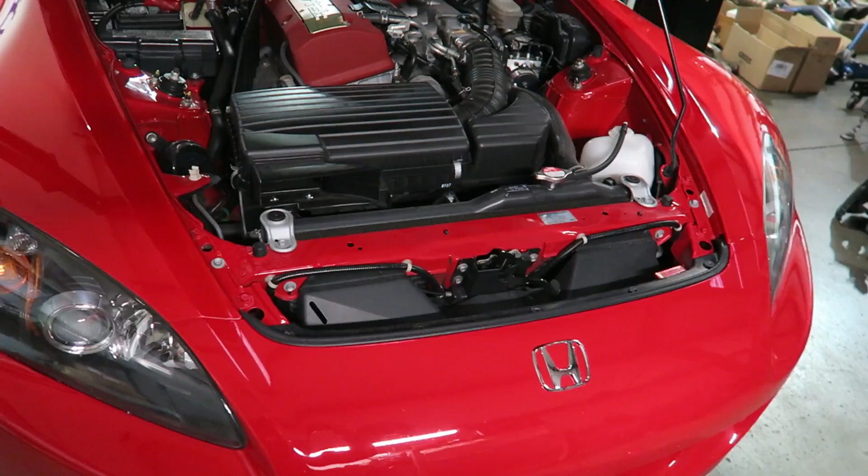So I talked about the Airbox mod. What I'm going to do is show you along the way what we do. I've tried a million different intakes on these cars, dynoed them, seen them in real world use, and believe it or not, the best intake you can do is stick with this. What I found is we changed the filter out. Okay, so this is the filter that you're going to buy.

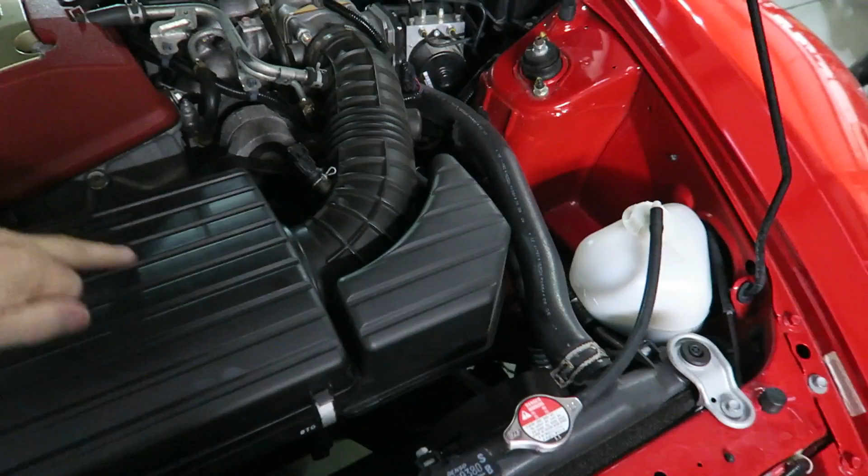This is the K&N replacement filter. K&N actually make a replacement filter. It's a large element filter that fits, but there is also some webbing in here that we remove. We block off this resonator area. Actually promotes more airflow through here.

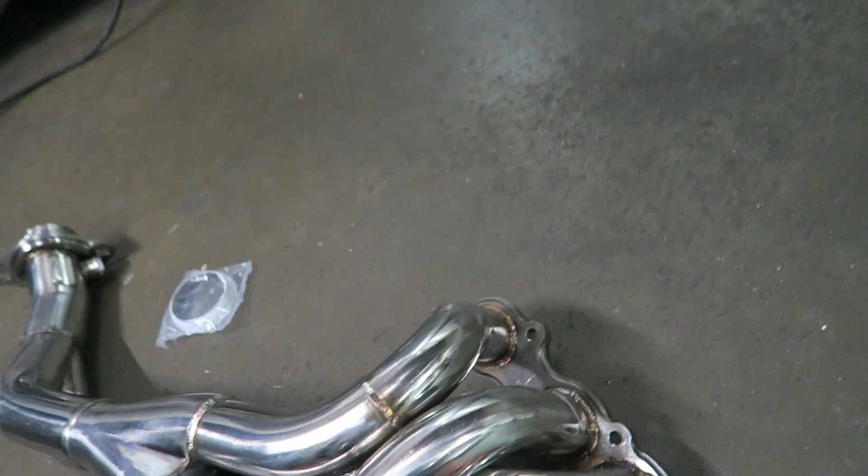Okay, here's a new Skunk 2 header. We're gonna go ahead and clean it, wipe it off, make sure there's no fingerprints on there, put the new gasket on there, and go ahead and install it.

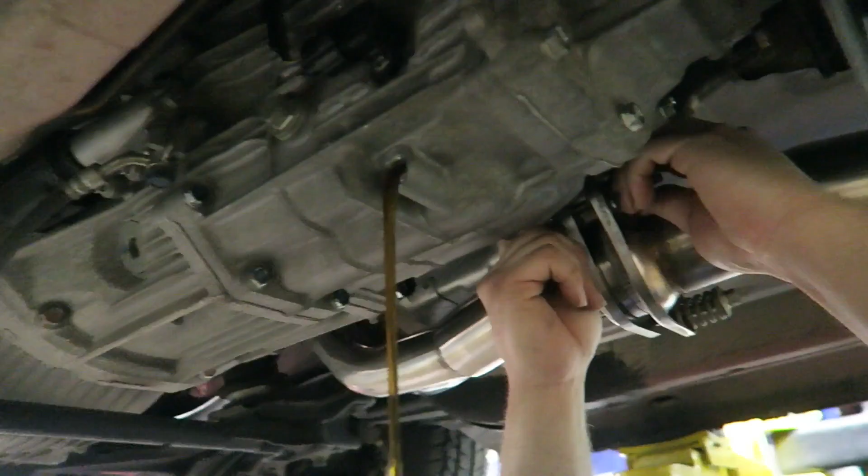So putting the spring bolts back in, George just made a good observation. The nastier the fluid, the increased chance you're going to have of dropping a bolt in it.

What do we got? Anything good? Yeah, Clutch Apprentice. Clutch Apprentice? Yeah, the new company. Nice. They're not really up to Clutch Master level yet, so they're cheaper. Sweet. Hopefully they don't burn out.

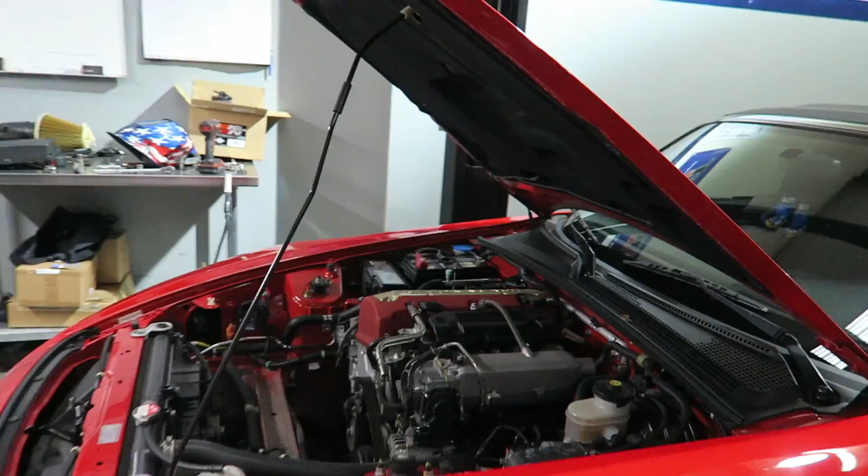Okay, so as the guy in the video says, break the top one loose first. Something about being able to fill it.

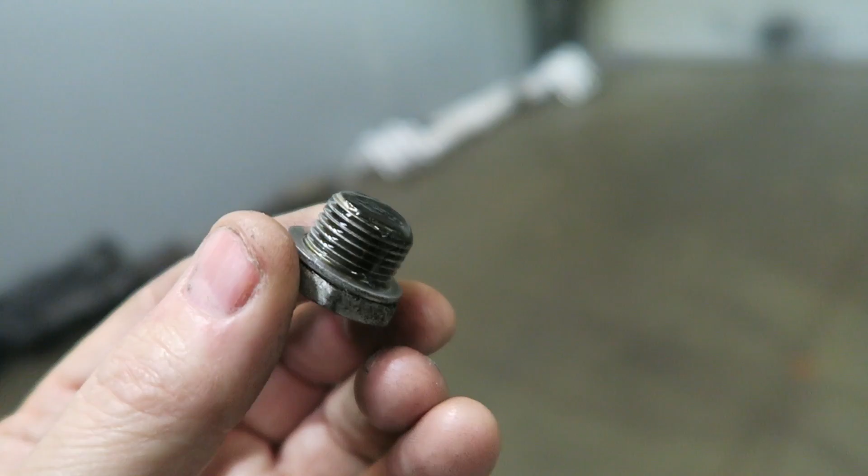Alright, looking at the drain plug, it's pretty clean. I don't want to start people getting paranoid about their drain plug and hoping that these are spick and span when they take them off. You're going to have material on here. Pretty much every car will produce material which gets into the oil, and because this is magnetic, this is where it sits.

Alright, I don't have my tripod, so don't forget Honda filter. Make sure you use a Honda filter, it's the big one. Don't forget. Alright, so our airbox is back in.

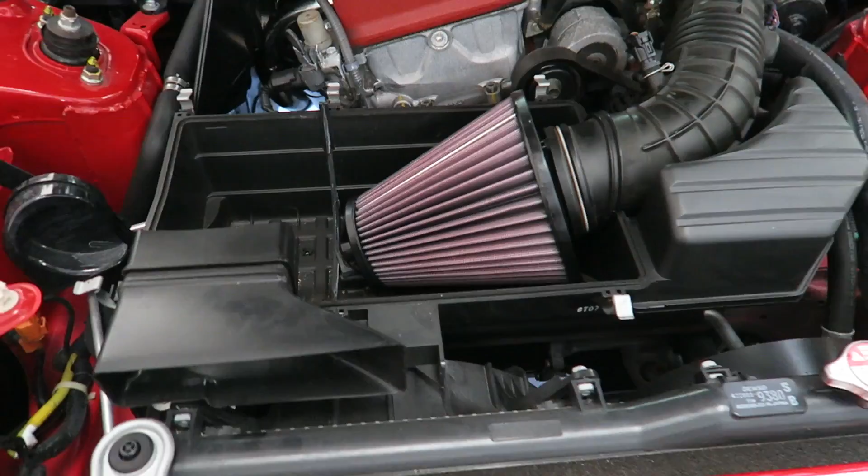We've done the necessary changes. You can't see where our Honda bond is, but that piece is glued in there. This is the K&N filter, like I was talking about. You see how it sits in there nice. Get the genuine K&N one, don't do the retrofit with a cone filter. The diameter is not the same here, it doesn't fit as tight. Okay, we are all set.

We're going to take this over to the dyno and start tuning. I have quite a few 06, 07 S2000s that we've done on there, and they all make about the same. Actually, they're surprisingly close to each other. So we can look and see what it makes stock, and we'll see what kind of gains we get over here.

So we got the factory tune that's in there right now. We're going to see what the baseline is. It's a nice cool day.

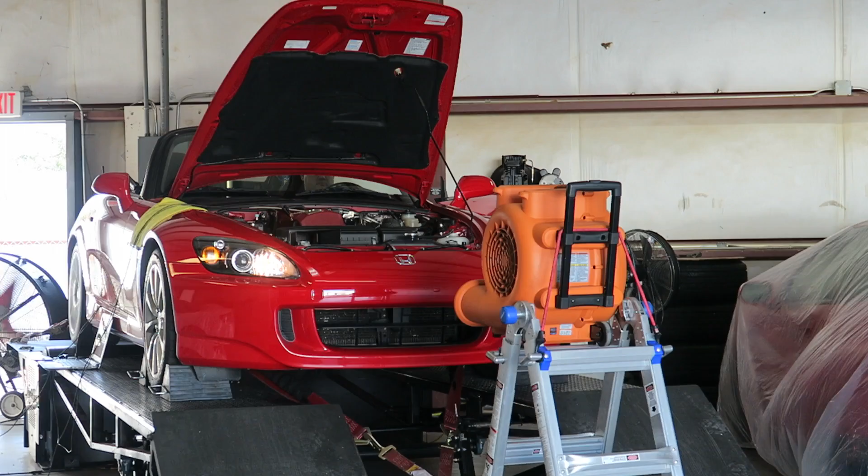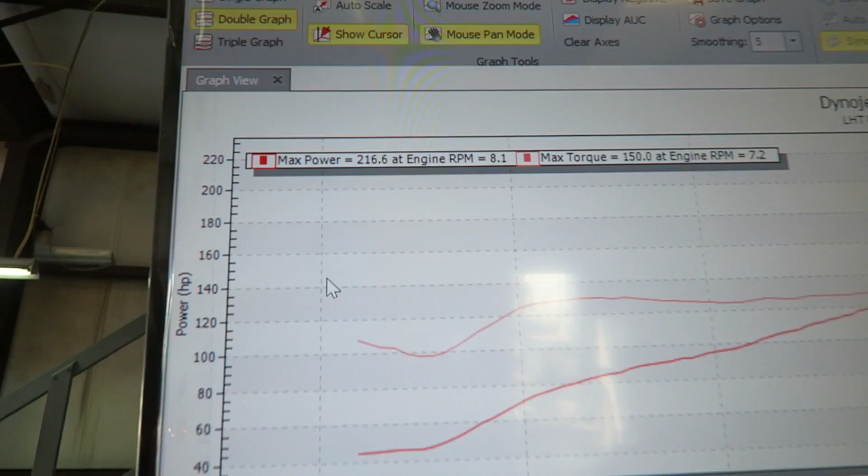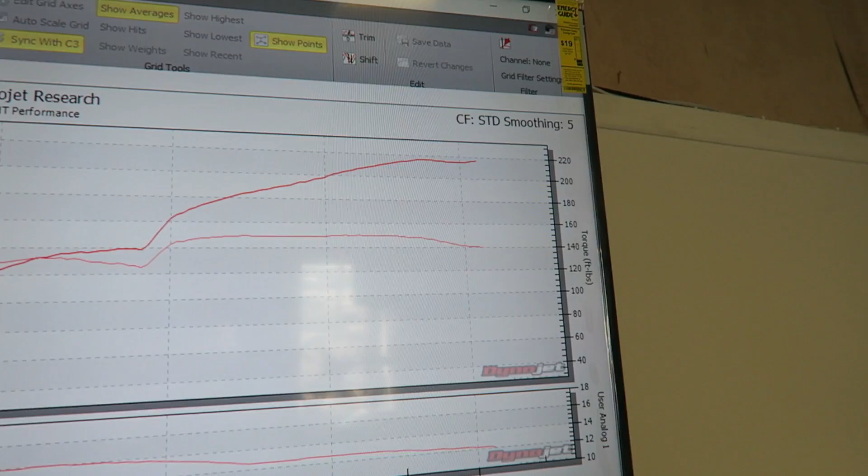Alright, this is our first run. This one did really well. 216. Very, very strong. You can see the massive dip on VTEC right here. You can see the power is falling off before VTEC engages. And then up top, it's not bad. It kind of lays over up top, but that's pretty strong. A little lean all the way through, which again, we did the Airbox mod and header. So we're going to need more fuel to combat our airflow.

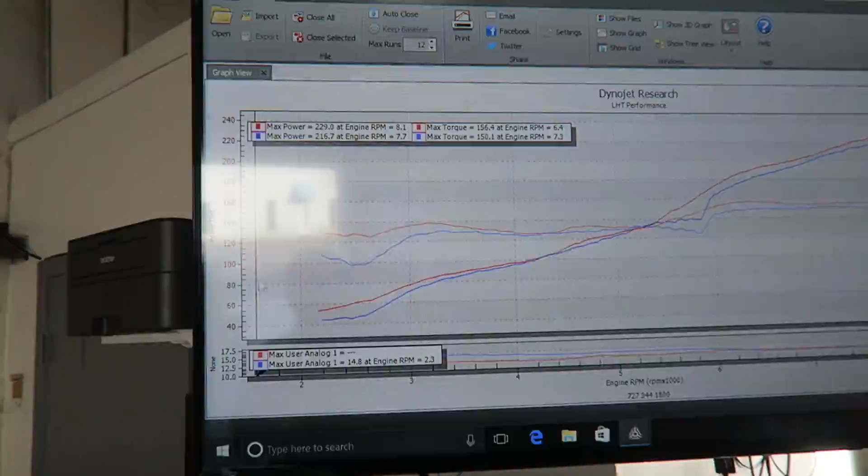Okay, we are all done. I would say that made some good power. First run was pretty strong. As I showed you earlier, it did 216, which with a header and airbox mod, we usually pick up 8 to 10.

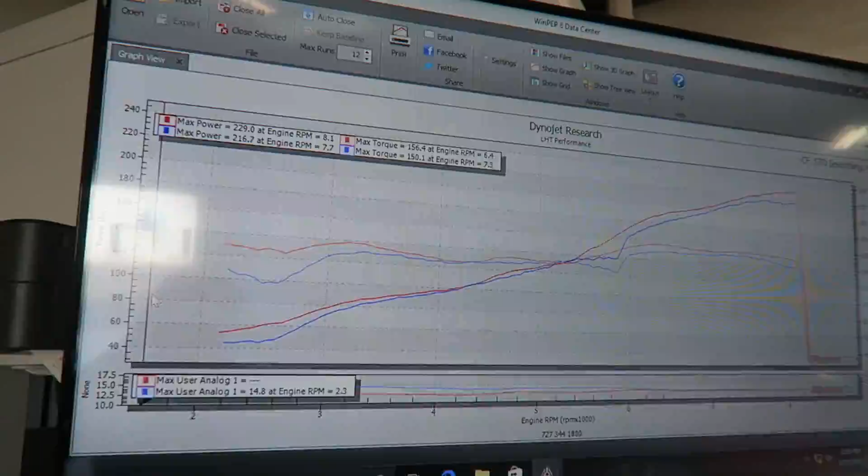So with tuning, we're at 229 and 156. We're about out of fuel on this. I'm up right around 90% duty cycle. Anything after 83, as you see over here, we're calling it a day. It's not really making any more power, but once it gets into 90%, that's too much duty cycle.

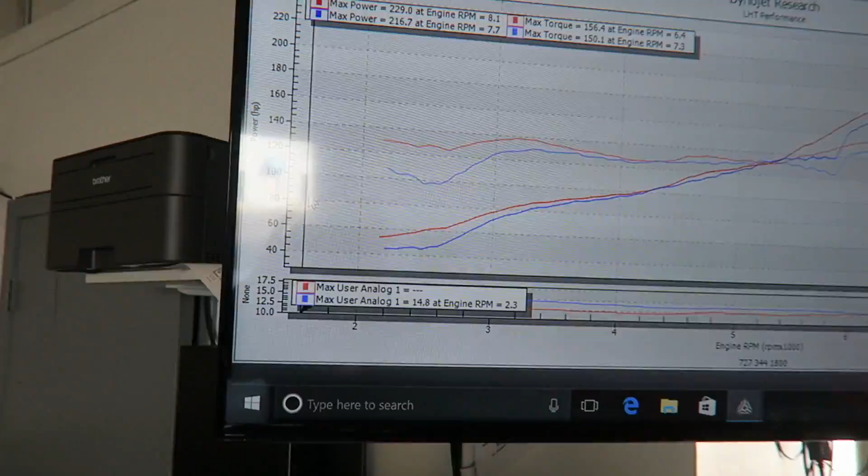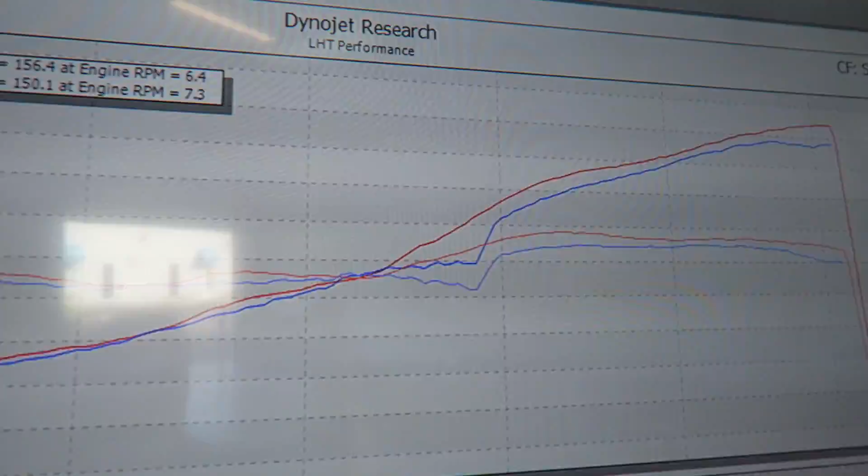As you see here, picked up a lot of power right here. This is just stabbing the throttle at 2200, and obviously the VTEC changeover made power, and then it continues to make power all the way up there. So I would call that a big success for just very small mods.

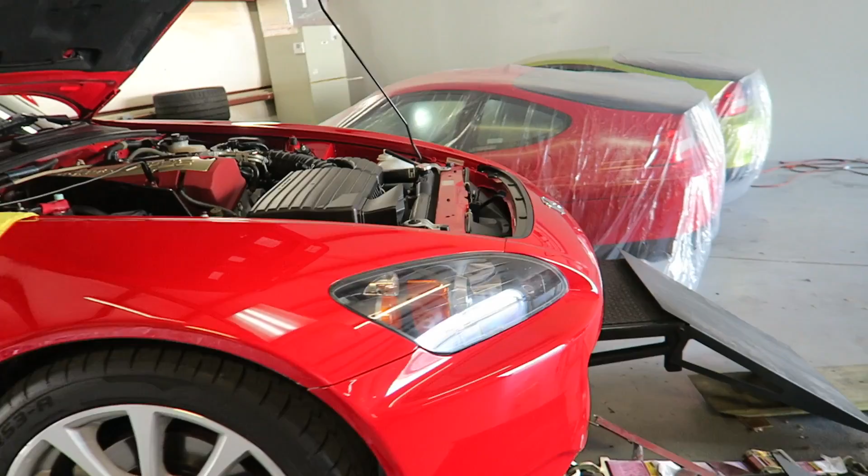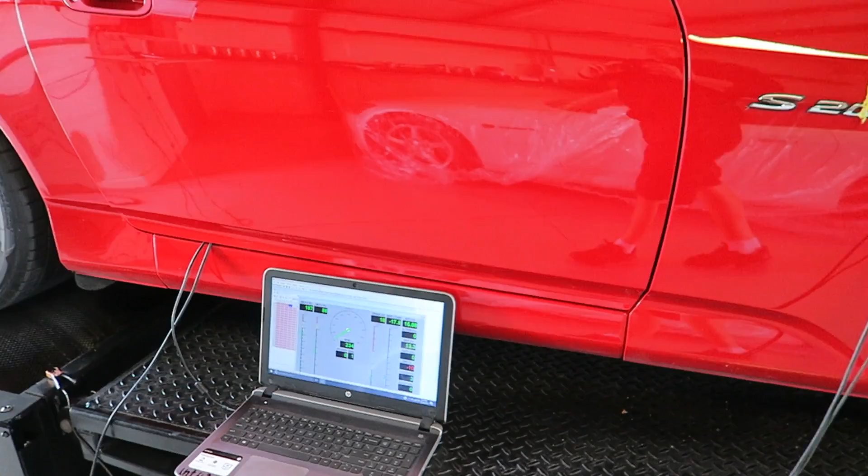The airbox mod, one thing I have noticed, it makes the power over and over. It doesn't really get heat soaked at all. And these headers, like I said before, it's not the best header for a naturally aspirated car, but this customer has plans of possibly supercharging it. But we have seen 8 to 10 horsepower with this header, and most of it being down low. But again, it's 10 pounds lighter, it makes more power. The car is set up to go supercharged. What better can you ask for?

So this car was actually a replacement for his prior car, which was a Laguna Blue, and he got totaled. Somebody with an SUV turned in front of him and totaled the car. So the replacement car, of course, is my favorite color. It's red. I like that car a lot. Super low mileage, great power.